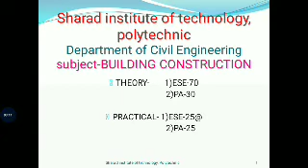So first we will see the syllabus content according to the MSBTE. So this is the copy of syllabus. In this unit number first, that is the overview of building component. In this unit we are going to see the classification of building as per the National Building Code and as per the type of constructions.

The second point, that is the building component. What are the various building components such as wall, partition walls, cavity walls, sill, lintel, door, windows, floors, roofs, column, beam. So these are the various components, and what are their functions, that we are going to see in the unit number first.

In the unit number second, that is the construction of substructure. In this unit we are going to see the job layout for the various construction sites. In this job layout, what we are going to see, that is the site clearance, preparing a job layout, layout for the load bearing and framed structure with the help of center line and face line method.

The second point in the unit number second, that is the earthwork, that is the excavation for the foundation, the timbering and strutting, the earthwork for embankment, material for the plinth filling, that we are going to see in the second point of the unit number second.

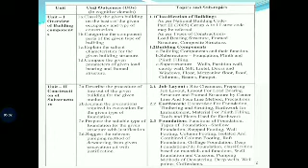Then third point in the unit number second, that is the foundation. So this is the main component which is included in the substructure. So this component, foundation, the types of foundations, that is shallow foundation, deep foundations, the various types of footings and the functions of foundation, that can be studied in the unit number second.

Unit number third. In this unit number third, we are going to see the construction of superstructure. So superstructure, this includes the construction of walls, slabs, columns, beams. So this includes the study of stone masonry, brick masonry and the scaffoldings required for the construction of beams, columns, slabs, etc. So this all is included in the unit number third.

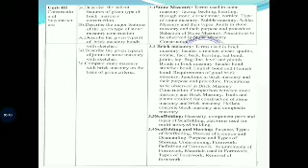Next, that is unit number 4. This unit number 4, it is the building communication and ventilation. The building communication that refers to the horizontal communication in the building. So it includes the doors and windows provided in the building. Types of doors, types of windows present in the building. What are the various materials which can be used for the preparation of doors and windows.

Now the ventilation and vertical communication, it is in the case of the vertical transportation in the building. So vertical communication, it is the study of staircases, ramp, lift, elevators and escalators.

So unit number 4 includes the study of doors, windows, then fixtures and fastenings used in the doors and windows, the material used for ceiling purpose and the vertical communication. So this whole is included in unit number 4.

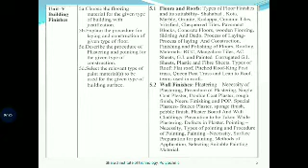Unit number 5, that is the building finishes. In building finishes, we are going to learn about the plastering and painting, floors and roofs in the building. What are the various types of tiles used for the flooring purpose? What are the various types of wall finishes? That is, what are the various types of plastering, for internal plastering, for external plastering? Which types of materials are used? What are the various types of painting? That we are going to see in unit number 5.

Then unit number 6, that is the building maintenance. So after constructing a building, if there is any maintenance required for that building, that is in the case of cracks, in the case of settlement of foundation, in the case of demolition and in the case of waterproofing, this we are going to see in unit number 6. So in this whole syllabus, we are going to learn about building construction.

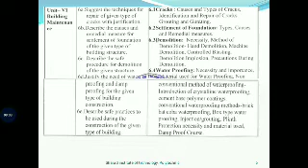Now we will start with unit number 1, that is overview of building components. So first we will see the definition of building. In general, the building is defined as any structure built for any purpose with any material for any use and which includes foundation, plinth, walls, roofs, floors, chimneys, plumbing and building services.

So a building is defined as any structure for whatsoever purpose and of whatsoever material constructed and every part thereof whether used as a human habitation or not and includes a foundation, plinth, walls, floors, plumbing and building services. This structure is known as a building. So in this we are knowing the various points such as foundation, plinth, superstructure, etc. These are the various components of the buildings with the help of which we can define a building.

So foundation is the lowest artificially prepared part below the surface of the surrounding ground, which is in direct contact with substrata and which transmits all the load to the subsoil. So the foundation is the base part of the building, which is below the ground surface and which is directly in contact with the soil, and which transfers all the load of the building to the subsoil.

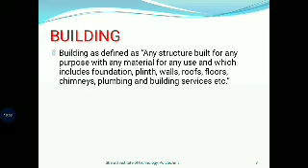And next, that is the superstructure. The part of the structure constructed above the plinth level is termed as a superstructure. So whatever building we are seeing with our eyes above the plinth level, all those parts come into the superstructure. So the building is constructed with the help of these three parts, that is the foundation, plinth and superstructure.

Now we will see the classification of buildings. These buildings are classified on two bases. First one is based on the occupancy, or according to the national code, and second, according to the type of construction. So first we will see the classification based on the occupancy as defined or identified in the National Building Code of India.

So according to occupancy, the buildings are classified under these groups. Group A is residential building. Group B, educational building. Group C, institutional building. Group D, assembly building. Group E, business building. Group F, mercantile building. Group G, industrial building. Group H, storage building, and Group I, hazardous building. So all buildings are classified under these groups according to the national code, based on the occupancy.

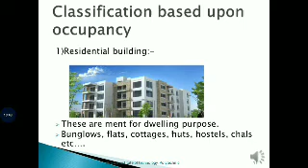The second, that is the educational building. So educational buildings are meant for running schools, colleges, training institutions, libraries, universities, etc. The educational buildings are those buildings which are meant for education from nursery to university, all included in this group. For example, schools, colleges, universities, training institutes, etc.

However, the National Building Code of India recommends that these buildings should be used for education or for imparting instructions for more than 8 hours per week. These buildings provide facilities like classrooms, staff cabins, drawing rooms, laboratories, administrative blocks, assembly halls for instruction, education or recreation, library, play fields, gymnasiums, etc. So, educational buildings are those buildings in which we are educating people in various fields. That is categorized into group number two, that is the educational building.

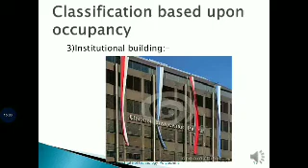Now, third, that is the institutional buildings. This group includes any buildings or part thereof which is used for purposes such as medical, health recovery after illness, physical or mental disease, care of infants or aged persons, penal detention, etc. These buildings normally provide sleeping accommodation for the occupants. These buildings are further subdivided into three groups. First, hospitals and sanatoria. Second, custodial institutions, and third, penal institutions.

So, it means a building constructed by the government or semi-government organization or the public sector or a charitable trust. These buildings are utilized for public activities such as education, medical, recreational and cultural, auditorium, orphanages, etc. It is also used for treatment or care of persons suffering from physical and mental illness. So these are known as the institutional buildings.

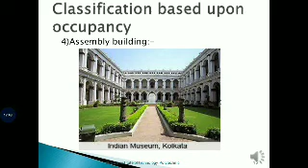Now group number 4, that is the assembly buildings. This group includes any building where groups of people assemble or gather for amusement, recreation, social, religious or similar purposes. For example, theaters, cinema halls, assembly halls, auditoria, exhibition halls, museums. These types of buildings are classified as assembly buildings.

So, these buildings are meant for assembly of a large number of people for amusement, recreation, social, religious, civil or similar purposes. So, in this category we can consider various theaters, halls, auditoria, museums, gymnasiums, restaurants, temples, churches, etc. So all these types of buildings are categorized as assembly buildings, in which a number of people come together for various purposes.

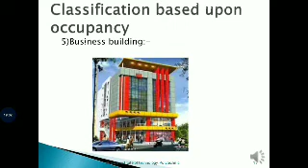The next type of building, that is the business buildings. This group includes any building or part of a building which is used for purposes such as transaction of business, keeping of accounts and records, etc. So, dispensaries and clinics, news stands, barber shops, banks, city halls, courthouses or libraries, etc. are categorized as business buildings. So, these business buildings are meant for running businesses, for transactions, keeping of accounts, keeping of records and for similar purposes.

The next type of building according to occupancy, that is the mercantile buildings. They are used as shops, stores, markets for display and sale of merchandise, either wholesale or retail. So this group includes any building or part of a building which is used as a shop, store, market for sale and display of products or wares, either wholesale or retail. These buildings are known as mercantile buildings.

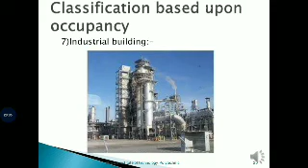The next type of building, that is the industrial building. So industrial buildings are the buildings in which products or materials of all kinds and properties are fabricated, assembled or processed. They accommodate plants and machinery, refineries, power plants, dairies, sawmills, cleaning plants, pumping stations, etc.

So, the industrial buildings: this group includes any building or part of a building or structure in which products of different kinds and different properties are fabricated, assembled or processed. For example, laboratories, assembly plants, laundries, gas plants, power plants, refineries, dairies, etc. So, the buildings under this group are further classified into three groups, namely G1, G2 and G3, depending upon the hazards of occupancy as low, moderate and high respectively.

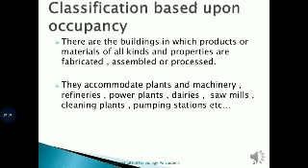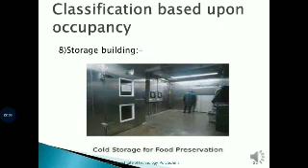The next type of building, that is the storage building. This group includes those buildings or structures which are primarily used for the storage or sheltering of goods, wares or merchandise, vehicles or animals. For example, warehouses, cold storages, freight depots, storehouses, transit sheds, truck terminals, garages, etc. These are termed as storage buildings.

So these storage buildings are used for storage or sheltering of goods, wares and vehicles. So in this category we can consider the following types of buildings, that is warehouses, cold storage, godowns, freight depots, transit sheds, storehouses, garages, etc.

And the last one that is not included in this presentation, that is the hazardous buildings. This group includes those building structures which are used for the storage, handling, manufacture or processing of materials which are liable to burn extremely rapidly and prove hazardous to the health, buildings or the building contents. Hazards may be due to fire, poisonous fumes or gases, explosions or ignitions, etc. from materials subjected to various operations.

Buildings used for storage of gases under high pressure or for storage and handling of highly flammable liquids or explosive materials, or for manufacturing of synthetic leather, explosives, fireworks, etc. are included in this group. So this is the last type of the building classified according to the occupancy, that is the hazardous building.

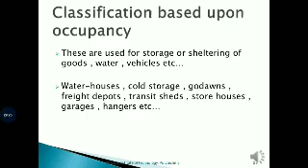And the last type, that is the hazardous buildings, which are used for the purpose of storing hazardous or poisonous materials in the gaseous form, solid form or liquid form. These types of buildings are known as hazardous buildings. So in this way we have seen the types of buildings according to the occupancy, according to the National Building Code. Now in the next session we are going to see the various types of buildings according to the types of structures, that is the load bearing structure, framed structure and composite structure. These three types of buildings we will see in our next video.

So in today's video we have learned about the whole syllabus of the subject, then the types of buildings based on occupancy, and the building and what is the need of building construction.